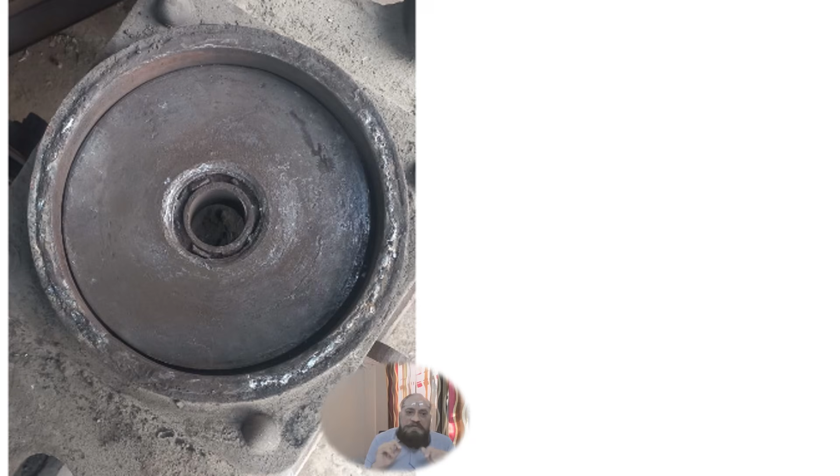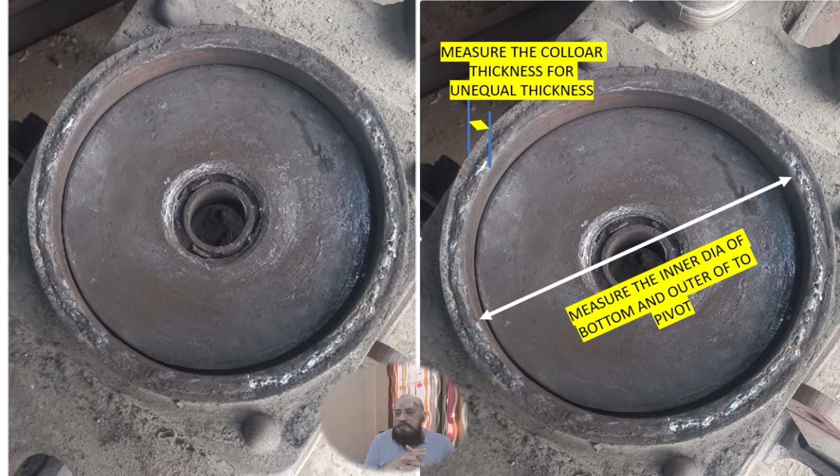Now this is a pivot picture of a wagon which had derailed one day after ROH in one of the divisions of Northern Railway. When I got the information, this picture was shared with me, and I immediately told them, you do this thing. You take the inner diameter and see the thickness of the collar. Even from the picture, we can see this is very, very thick over here, and this is thick. And this is worn out in this area more. And what we found, I will show you next.

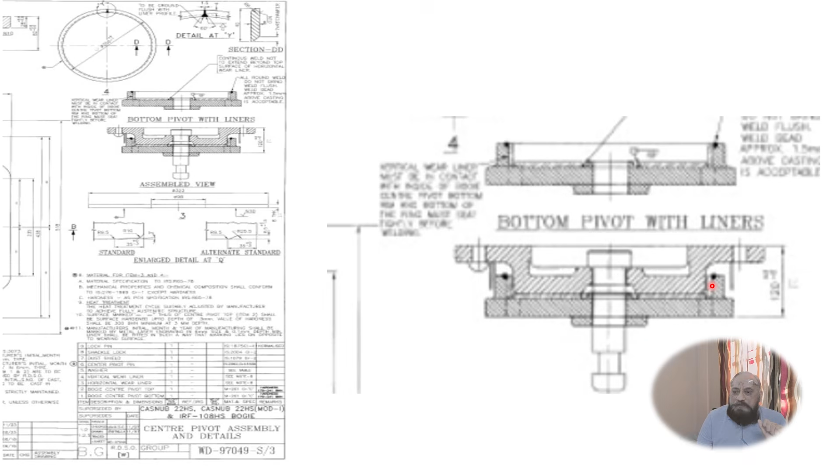So when I asked them to take the measurements of the pivot, the reply was that the ROH shed says they don't have the gauge to measure the wear, vertical and horizontal. So a very simple formula I gave them. You take this drawing and measure this height from the bottom to the top. This is the top piece, this is the bottom piece, this is the vertical liner, this is the horizontal liner. The thickness of these is 8 mm. So ultimately they took the diameter. I'll show you what happened next.

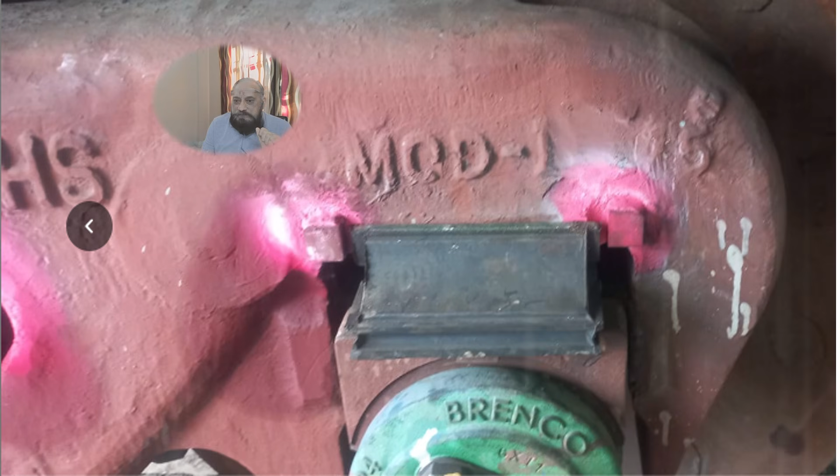This trolley is HS mod 1. So I always emphasize that whatever is mentioned on the trolley should be very clearly recorded. Whatsoever is embossed on the side frame gives a clear indication. Now this mod 1 has got different springs from your CASNUB HS and NLB. There is a third type, another one, mod 2. So we have to be very careful while recording the parameters of these trolleys.

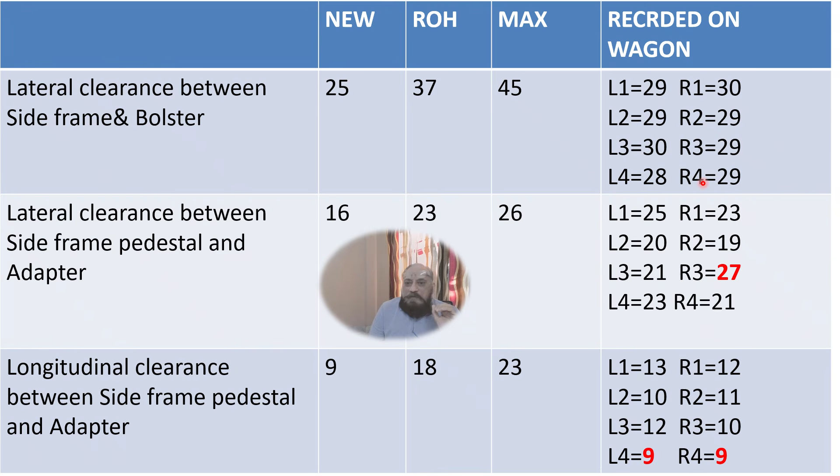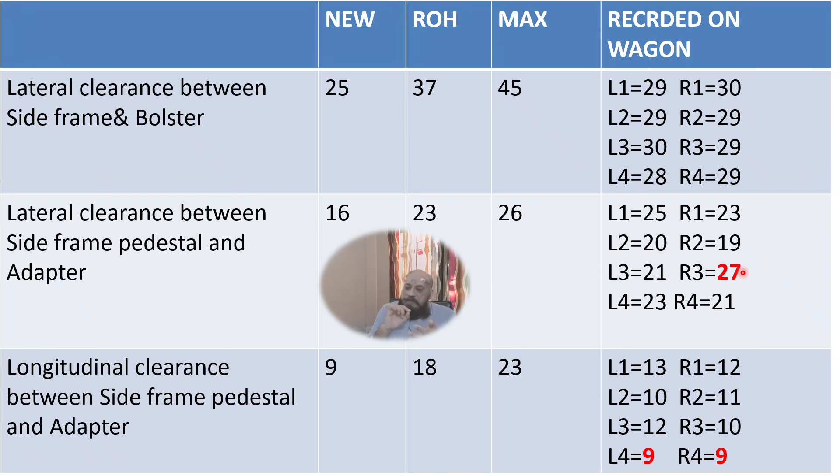These were the lateral clearances we took, and now see, a very funny thing. In ROH, this is 9. 9 is for new. Then we have 13, 10, 12. Here, the maximum is 26, and after ROH and derailment, we recorded 27. So this gives a clear indication whether these were checked or not. There is a proforma, there is an inspection. Every wagon after ROH is inspected, maybe by a neutral TXR system or otherwise, but उसमें क्या करते हैं? I leave it to the inquiry committee to call for that inspection chart. It is very clearly mentioned in that what the clearances are post-ROH.

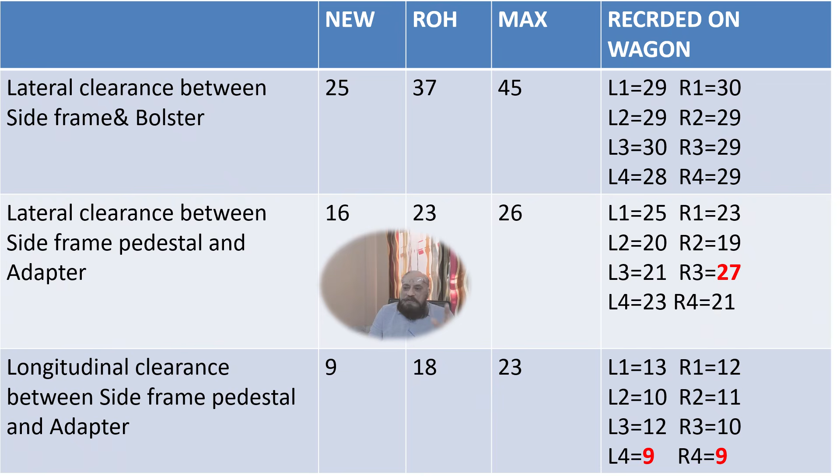So we have to be very particular about the springs, that these resemble with the NLB HS. क्योंकि उनकी 260, 262 की हाइट होती है, इसकी 253 है, but there is a range. There are 4 categories of spring heights. तो ये हो जाती है.

So what this will do? This will have an unequal share of the load, and the springs were found loose. They could be shaken by hand. This is what we got. We have a detailed report. We'll show you. Now, this is the summary.

There was a great hue and cry once the defects were pointed out. So, condition of the center pivot visually seen and found, horizontal liner badly damaged, and these are the conditions after the ROH, when the wagon was turned out from the shop. And very fortunately, it derailed so that it can be sent back again to ROH for getting these things corrected. I don't know whether they will correct it or again paint it and send back.

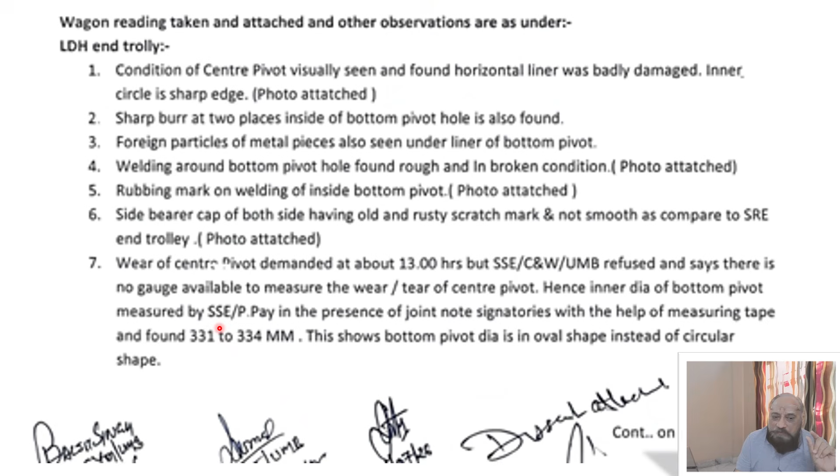So another top thing what I wanted to show you was here at the center pivot. The diameter was varying in the same pivot, it was varying 331 to 334. Just imagine. So it has become elliptical. Whatever I told you in the pivot picture, that the collar thickness is varying, from the photograph it is appearing. So this was because of that. Right. Now moving on to the next.

Outer dia of the upper center pivot was not given, because they were afraid we can make out the clearance from the bottom inner dia and the top outer dia. Well, they said they don't have the gauge. What a funny thing. It was all avoidance of giving evidences. Once we found the springs defective, they were rattling when we shook them with the finger points.

So now you see free height measured on machine and found that 8 outer springs were beyond the grouping limit. Now maximum is 250 to 253, and whatever has been jointly recorded that I am producing is nothing of my own. 7 inner springs were out of the range. One number is out of the range. How does the wagon work? What was kept on it during ROH? Nothing.

So this clearly indicates that it is only the turnout of the workshop which is being increased by showing the wagons have been turned out. I don't think they maintain any data. And never is that data given to engineering. Engineering, the inquiring officer also don't know what data is to be extracted from the ROH. So what was our main motto? Now, this is the outcome of this GST-DI system.

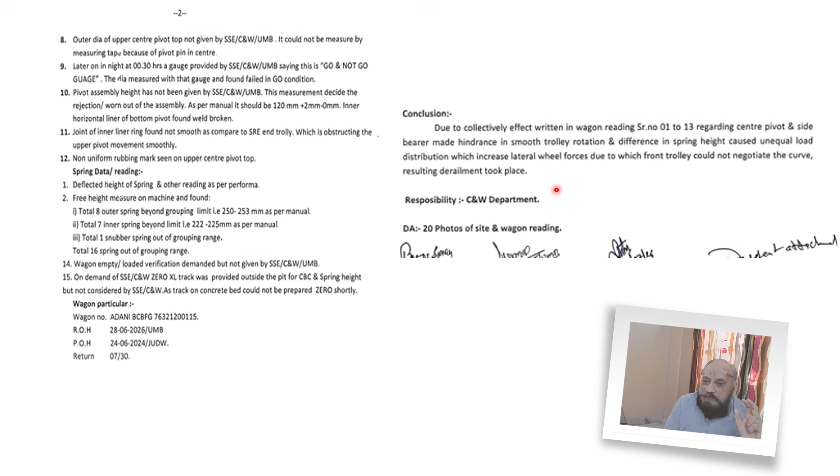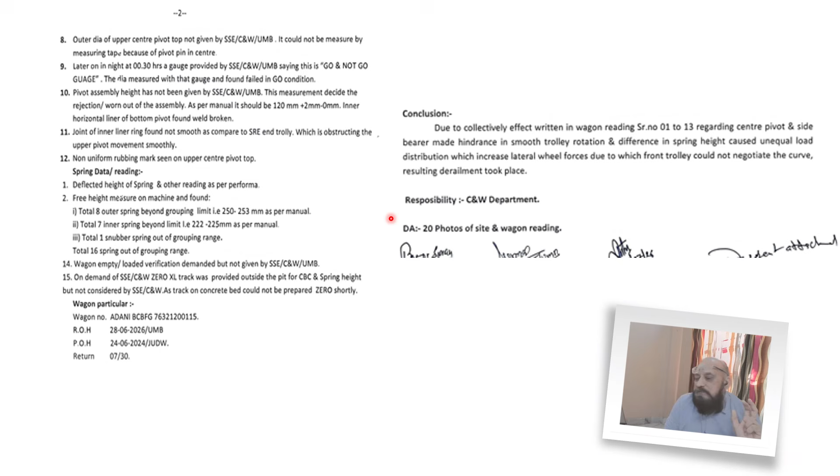So this is the technique which I wanted to focus on for the purpose of making inquiries and not unnecessarily blaming any department without proper evidence and hiding their own defects. So this is GST-DI. Well, this was all what I wanted to share with my viewers, that with these techniques, just going by the data, collecting the evidences, and comparing the measurements we have taken with the standard ones given in the manuals, provisions, and the drawings, we can at least come to a better conclusion, and we can modify our way of inquiring.

It doesn't need to write 40, 60, 300, 400, 500 pages. Kathi karo statement, wo sab bakwas, time wasted. Be pinpointed, be very, very exclusive. Take few evidences, take the data of the derailed rolling stock, take the data of track. Because generally in block section, these are the only two things. And rather than blaming, rely on evidences. This is what I wanted to show through this video.